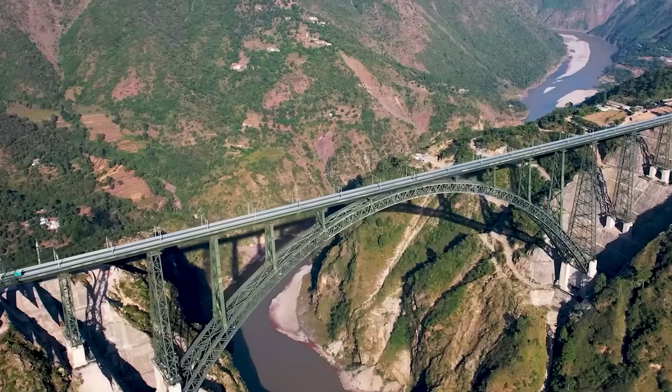Picture this. You're standing 359 meters above a raging river, higher than the Eiffel Tower. Now imagine building a railway bridge at that height in the Himalayas, in one of the most earthquake-prone zones on Earth. India just finished exactly that.

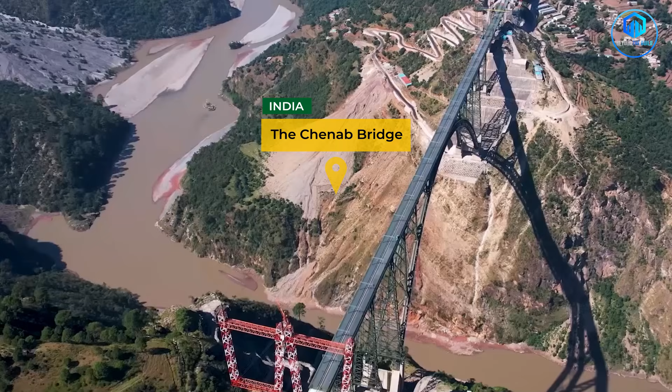But this never started as a record-breaking project. The Chenab Bridge became the world's highest railway bridge because of where it had to be built. The height was the price of the location, and that location is where the real story begins.

Let's talk about Jammu and Kashmir, one of the hardest places in the world to reach. The Chenab River cuts through the Himalayas, creating gorges so deep that for centuries, locals accepted some places couldn't be connected. Roads washed away in monsoons. Most engineers who looked at the gorge just walked away.

The terrain here doesn't just challenge construction, it punishes it. The gorge: the Chenab River sits at the bottom of a valley so deep that standard bridge building techniques don't apply. You can't build supports from the riverbed up, the distance is too extreme, and the rock formations are unstable.

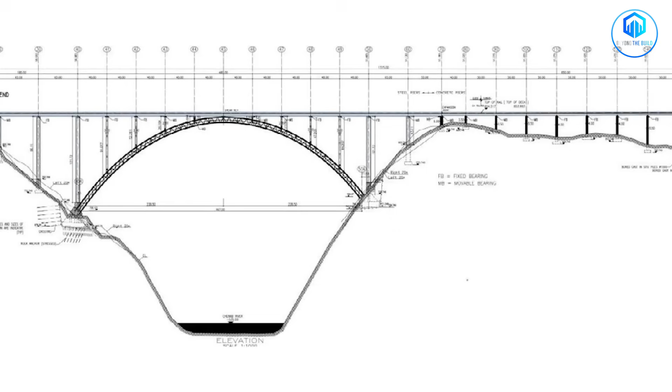Seismic activity: this region sits in seismic zone V, the highest earthquake risk category in India. Every structure needs to withstand tremors that would collapse buildings elsewhere. When the earth moves, everything you've built needs to move with it without breaking.

Himalayan winds: wind speeds here can exceed what most bridges are designed to handle. Forces that can lift vehicles off roads and tear metal structures apart.

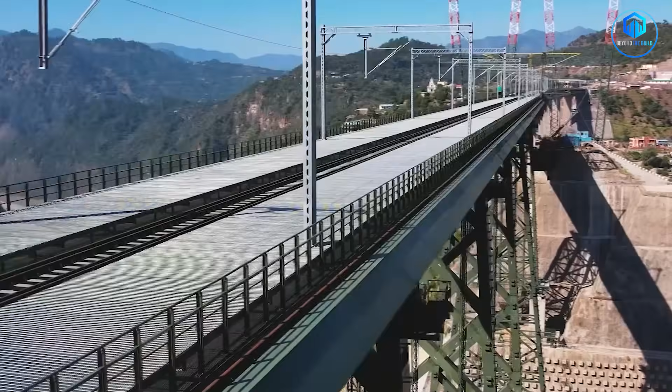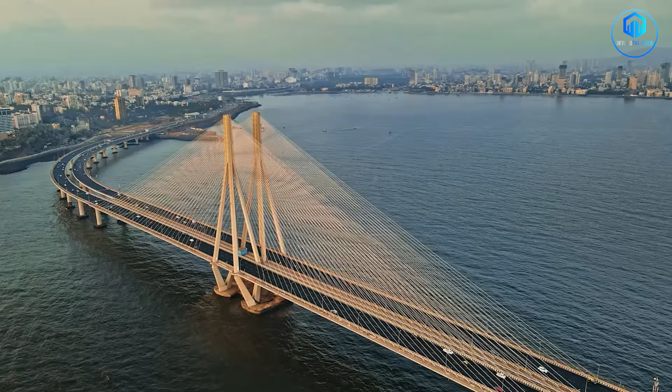Temperature extremes: summer heat reaches 45 degrees Celsius, winter cold drops below -10. Steel and concrete expand and contract constantly. Materials that work in Mumbai or Delhi crack and fail in the Himalayas.

For a very long time, Jammu and Kashmir remained partially isolated because nature made connection almost impossibly expensive. Roads closed for months during heavy snow. A single landslide could cut off entire districts. Medical emergencies became death sentences. Economic development stalled because goods couldn't move reliably. Without year-round, weatherproof transportation, the region remained vulnerable.

When a region can be cut off by a snowstorm, it changes everything: how people live, how businesses operate, how the government can respond to crises. So the question became, how do you build permanent, reliable connections in a place that destroys everything you build? The answer turned out to be a railway bridge that nobody believed was possible.

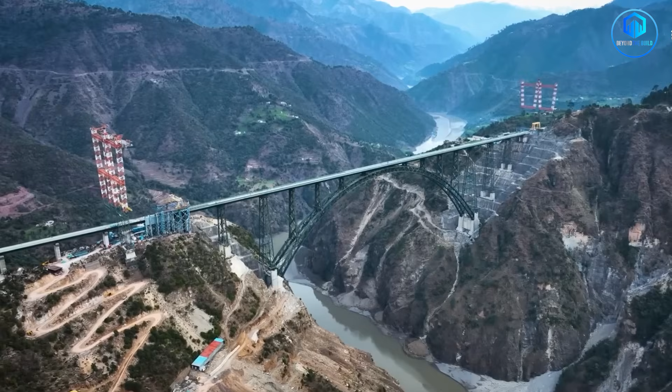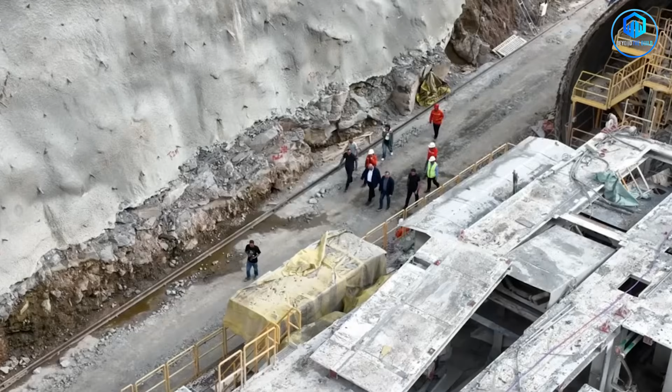When engineers first surveyed the Chenab Gorge in the 1990s, their initial reaction was clear: avoid the bridge if possible. Tunnels seemed smarter. Tunnels protect trains from weather, they're hidden from view, which matters in sensitive regions, and most importantly, tunnels don't require you to suspend hundreds of tons of steel and concrete 359 meters above a river. So they tried the tunnel approach first.

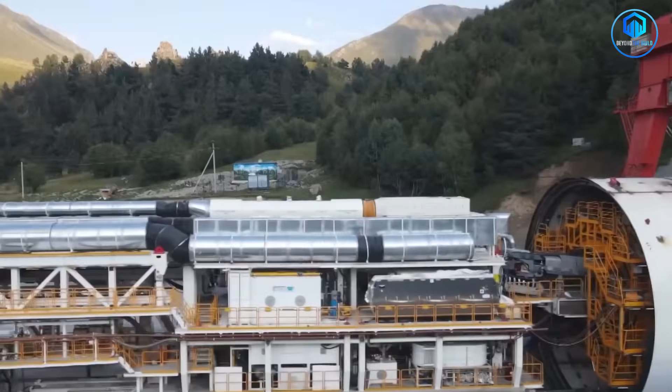The plan was to drill through the mountains, bypassing the gorge entirely. Work began, money was spent. Engineers drilled into solid rock. And then they hit the problems: unstable rock formations.

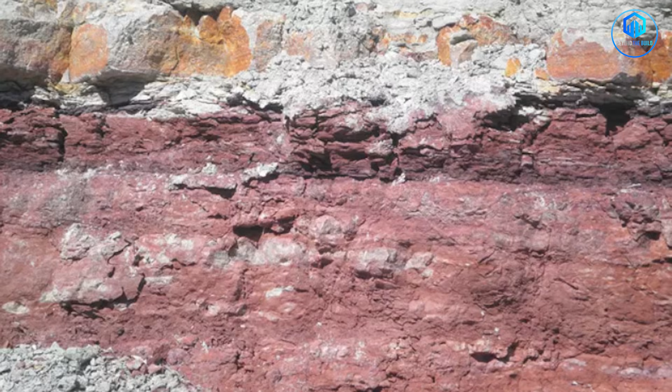The Himalayas differ from older, stable ranges like the Appalachians. These mountains are young, still rising, still shifting. The rock layers are fractured and unpredictable. Tunnels that appeared stable on surveys often ran into sections where the rock was so broken that standard tunneling methods failed.

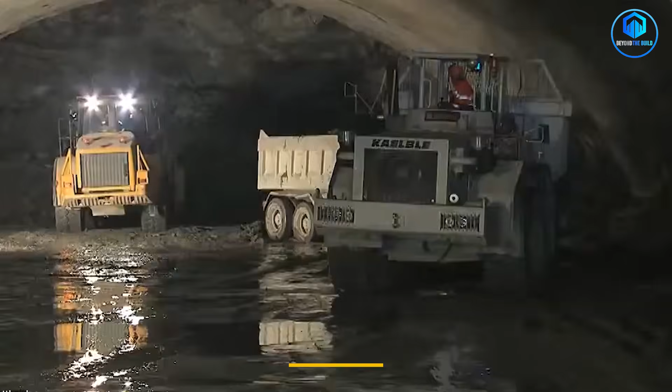Water: underground water sources in the Himalayas don't follow predictable patterns. Drill into the wrong spot, and you're suddenly dealing with floods inside your tunnel. Controlling water flow at this scale, in these conditions, became a nightmare.

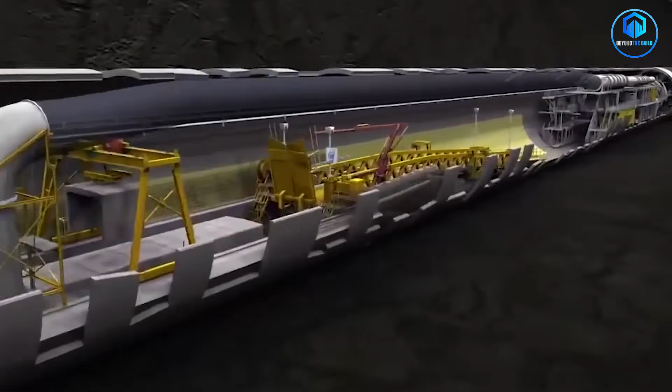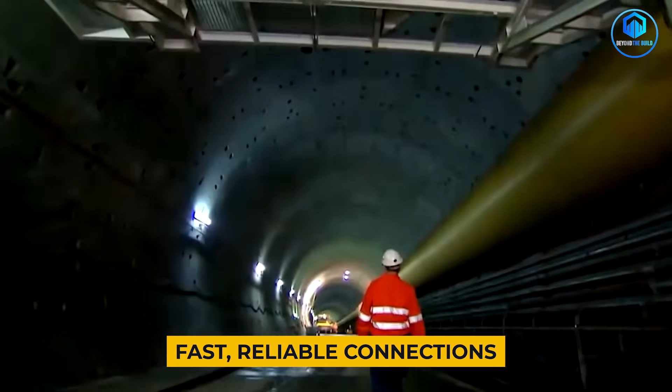Length: to avoid the gorge completely, the tunnel would need to be so long that travel time would increase dramatically. The whole point of this railway was to create fast, reliable connections. A tunnel that added hours to every journey defeated the purpose.

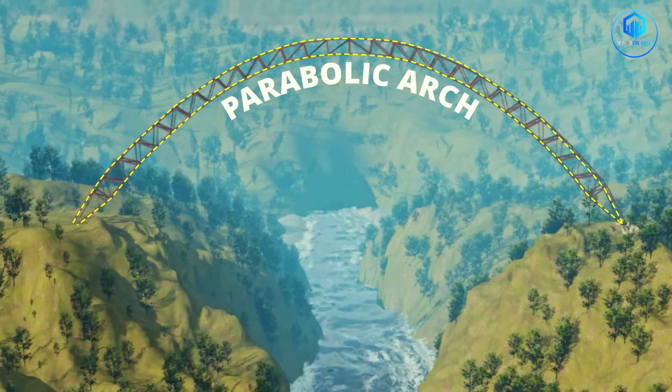After years of attempts and delays, the conclusion was unavoidable: there was no way around the gorge. The only way forward was across it. But crossing it meant building something unprecedented. Traditional bridge designs didn't work. The span was too wide, the height was too extreme, the geological conditions were too unstable.

What they needed was an arch bridge, a design where the structure itself bears the load through compression, making it incredibly strong against both its own weight and external forces like earthquakes and wind. But arch bridges at this height had never been attempted for railways.

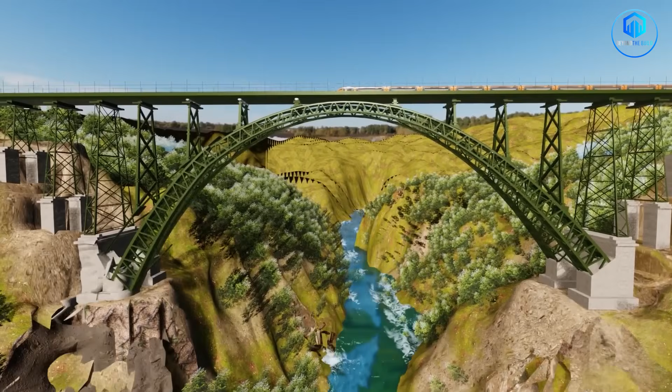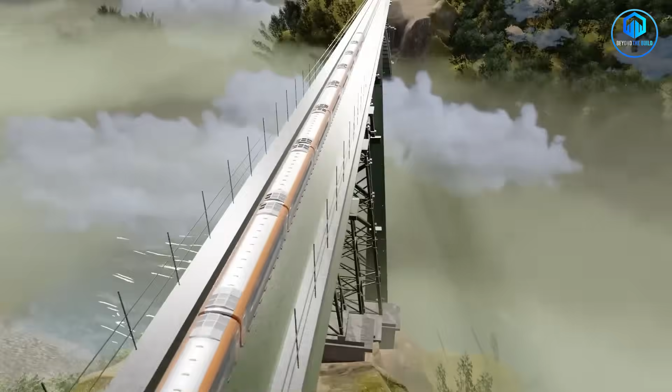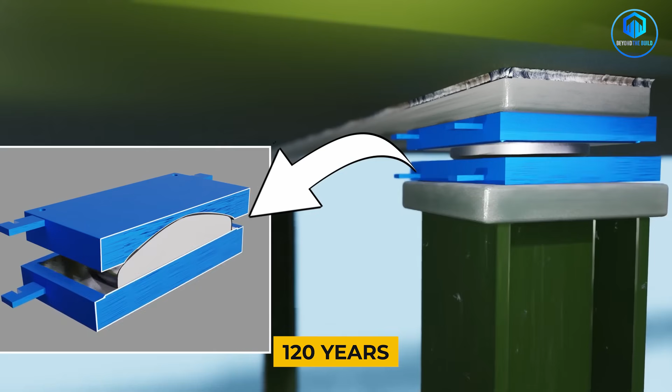Think about what this means. You're not just building a bridge, you're creating a structure that needs to support the weight of fully loaded freight trains, withstand earthquakes that would level most buildings, resist wind forces that could literally blow train cars off the tracks, function in temperatures that swing 55 degrees between seasons, last for at least 120 years with minimal maintenance. And you're building it in a place where getting materials and equipment to the construction site is itself a major engineering challenge.

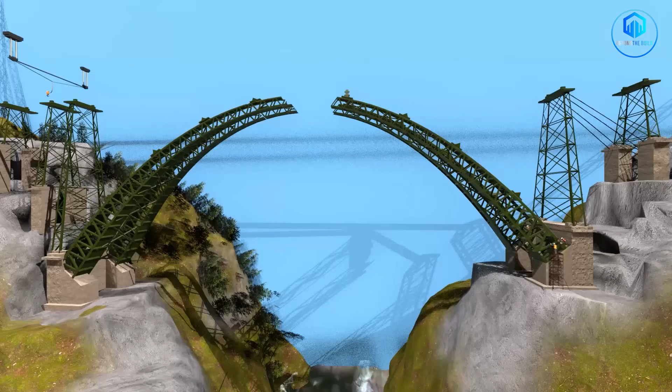That record-breaking height of 359 meters came from necessity, not spectacle. It was the minimum height required to span the gorge while maintaining structural integrity. Go any lower, and the arch angle becomes too shallow - the physics doesn't work, the bridge collapses under its own weight. Go higher, and you're adding unnecessary cost and risk. 359 meters was the solution to an equation, not a vanity metric.

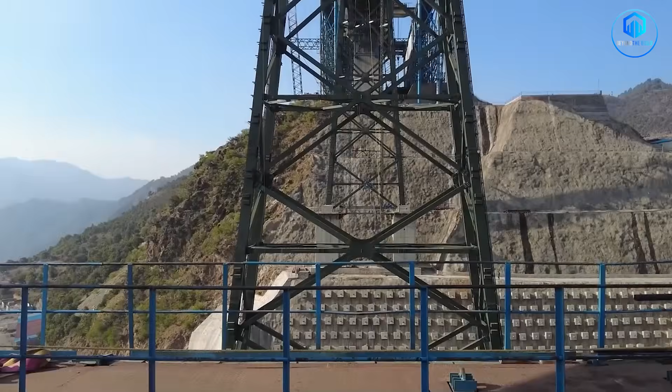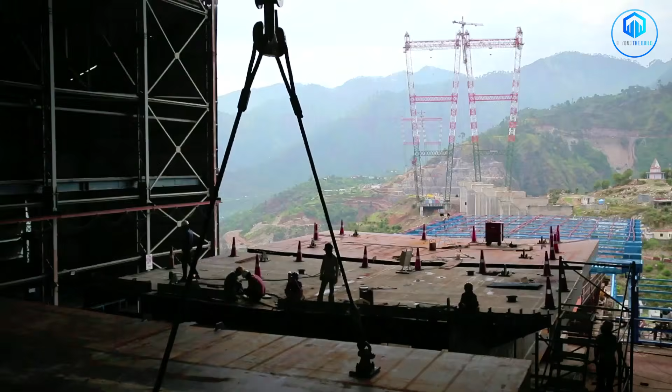Now let's talk about what it actually takes to build something like this. Construction began in 2004. The original completion target was 2009. It took until 2024, so 20 years to finish. That's not because of incompetence or corruption. It's because every single aspect of this project required solutions that had never been tested before.

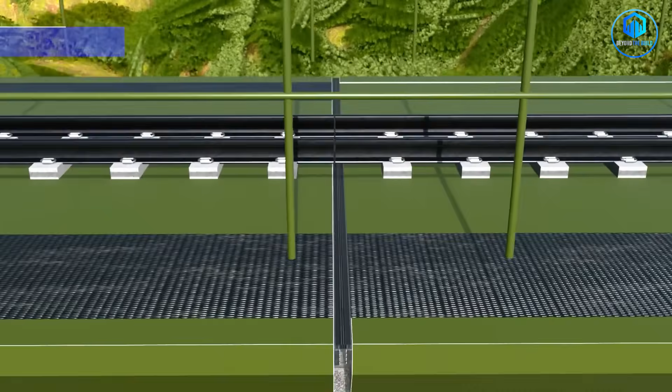The wind problem. Typical railway bridges are designed so that trains stop running long before winds reach extreme levels. But the Chenab Rail Bridge itself is engineered to withstand winds of up to about 260 kilometers per hour in the gorge. At those speeds, wind does more than push against the bridge, it creates vibrations that can tear steel apart from within.

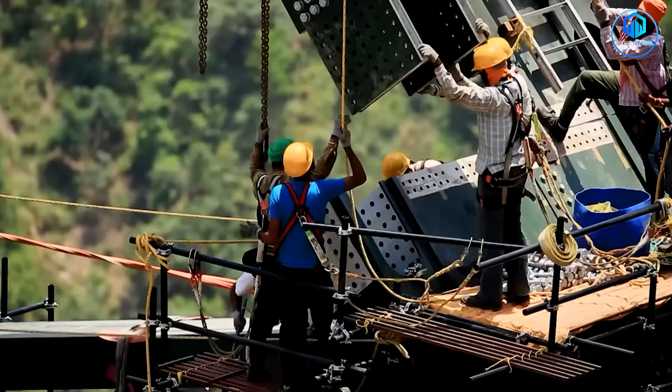The solution? A design called a cable-stayed arch that uses aerodynamic shaping to let wind flow around the structure instead of slamming into it. But that required wind tunnel testing at scales no one had attempted for a railway project in India. Engineers built scale models and tested them in facilities in Denmark and Japan. They simulated wind patterns specific to the Chenab Valley. They calculated the exact angle and shape of every beam to minimize resistance, so the bridge would be able to resist under extreme wind conditions.

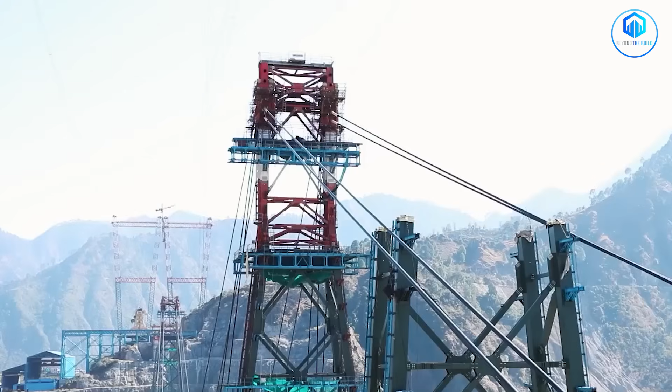The earthquake problem. Seismic Zone V means this bridge needs to survive earthquakes measuring up to 8 on the Richter scale. But here's the tricky part: you can't make a bridge completely rigid. Rigid structures crack and collapse during earthquakes. What you need is flexibility, the ability to move with the ground without breaking.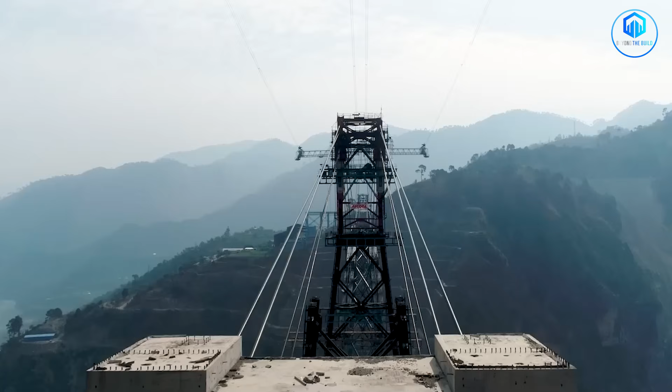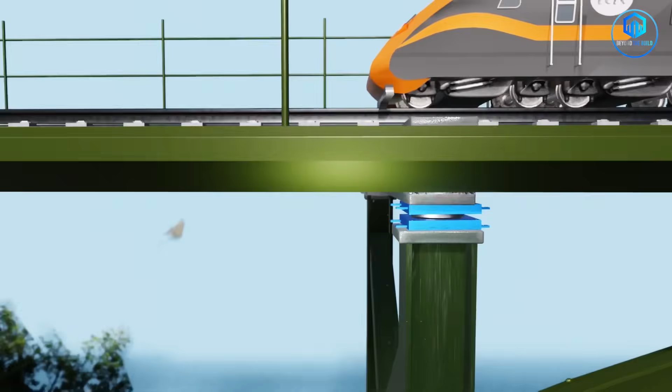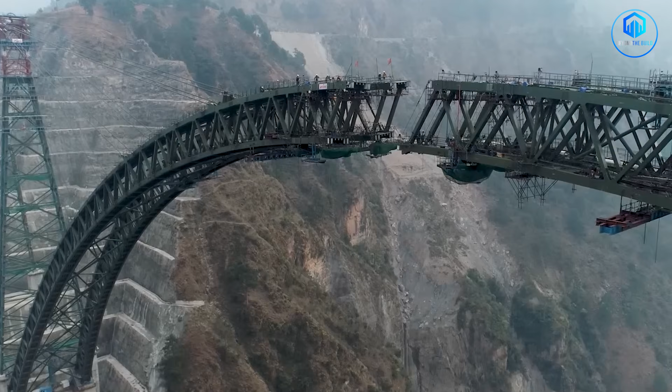The Chenab Bridge uses something called base isolation technology, shock absorbers built into the foundation that let the bridge sway during an earthquake, absorbing the energy instead of fighting it. Think of it like a car's suspension system, but for a structure weighing 25,000 tons. Testing this required simulating earthquakes in laboratories. They built sections of the bridge and literally shook them with hydraulic machines that replicate seismic waves. Every joint, every bolt, every weld had to prove it could handle the stress.

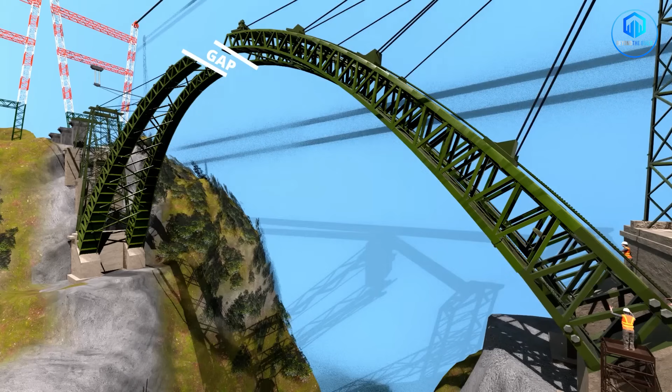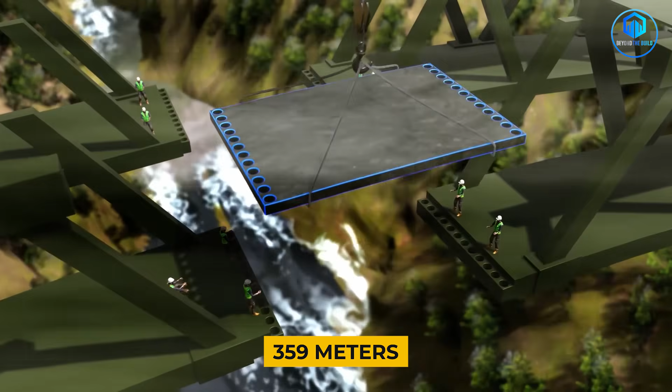The precision problem. When you're building a bridge this size, precision matters in ways that are hard to imagine. The two sides of the arch were built simultaneously from opposite ends of the gorge. They had to meet in the middle with millimeter-level accuracy. Think about that: you're building two massive structures, each weighing thousands of tons, on opposite sides of a gorge, and they have to align perfectly when they meet 359 meters above a river. Any miscalculation, and the pieces don't fit. You can't just hammer them together and hope for the best.

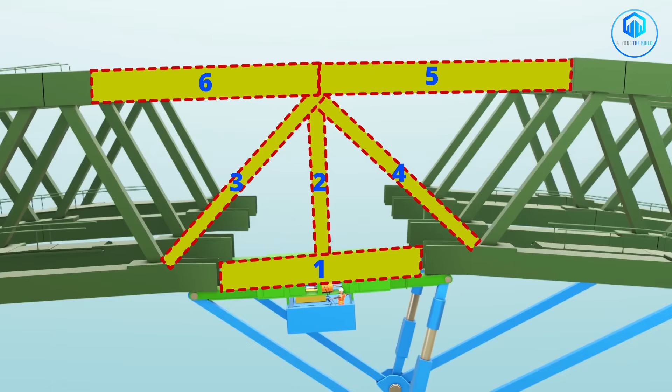The engineering team used GPS-guided systems that adjusted in real time for temperature changes, wind deflection, and even the weight of workers on the structure. They calculated how much the steel would expand in sunlight and contract at night. They accounted for gravitational pull differences at different elevations. When the two sides finally met in 2021, they were off by less than 2 centimeters.

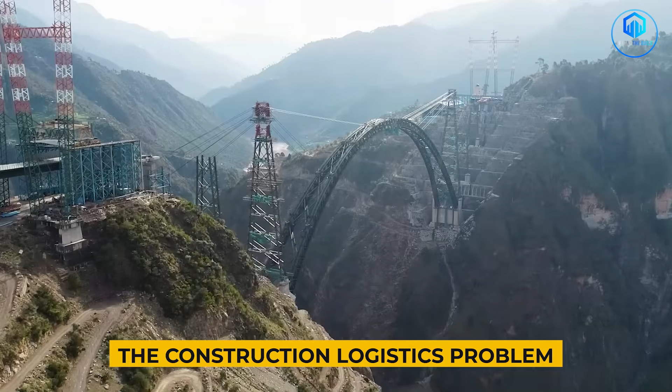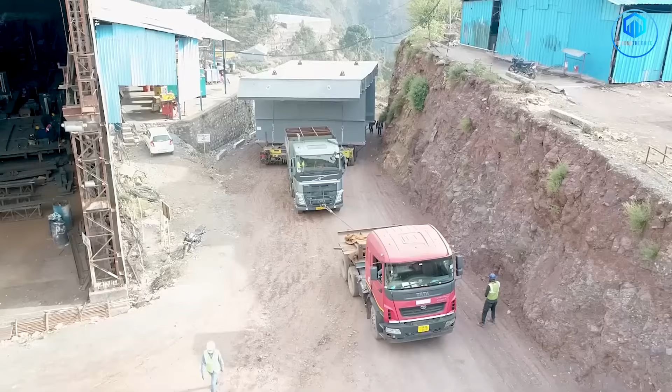The construction logistics problem. Here's something most people don't think about: how do you even get construction materials to a gorge in the middle of the Himalayas? There were no roads capable of handling the heavy equipment needed, so they built roads. Then those roads got destroyed by monsoons, so they built them again. Steel beams weighing 100 tons each had to be transported on trucks that could barely navigate mountain curves. Concrete had to be mixed on-site because it would harden before reaching the construction zone if transported from cities.

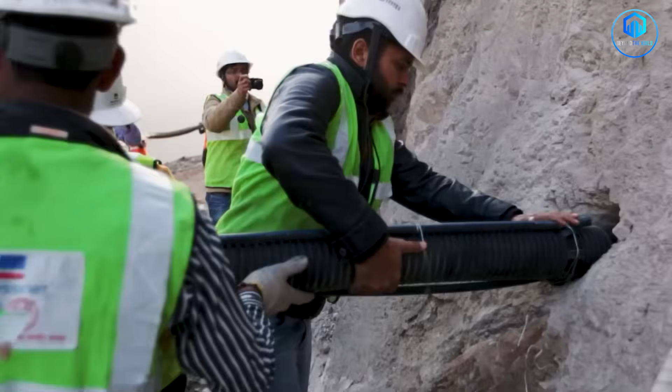Workers lived in temporary camps with minimal facilities. Medical emergencies meant helicopter evacuations. During winter, construction stopped completely because conditions became too dangerous. And through all of this, the project faced constant political pressure. Every delay meant more criticism. Every cost overrun meant more scrutiny.

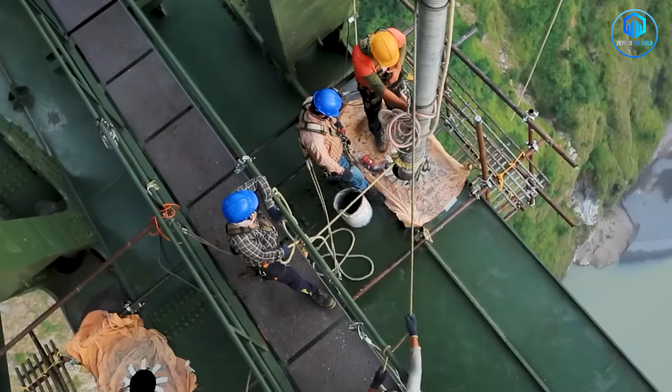But they kept building. So why go through all this? Why spend over $500 million and 20 years on a single bridge? Because in certain places, connection is non-negotiable. Let me explain what rail connectivity actually means in a region like Jammu and Kashmir.

Roads versus rail. The reliability question. Roads in the Himalayas are seasonal. Heavy snow closes them for months. Landslides block them for weeks. During the 2014 Kashmir floods, entire highway sections were washed away, cutting off hundreds of thousands of people.

Roads in the Himalayas face constant pressure from nature. Heavy snowfall blocks high-altitude routes for long stretches during winter. Landslides bury sections of mountain highways without warning. Floods damage surfaces and wash away entire stretches of road. During the 2014 Kashmir floods, key highway links collapsed, leaving hundreds of thousands of people stranded and supplies delayed.

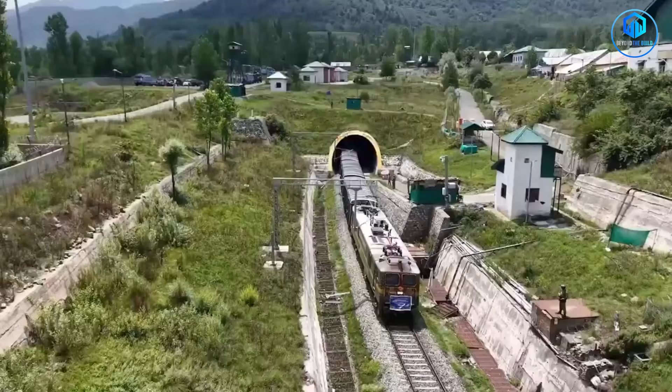Railways offer a different level of stability. Trains operate through snow and rain. Tracks sit on engineered foundations designed to handle extreme conditions. Once the line exists, it provides a year-round connection that holds steady through seasons that often shut down road travel.

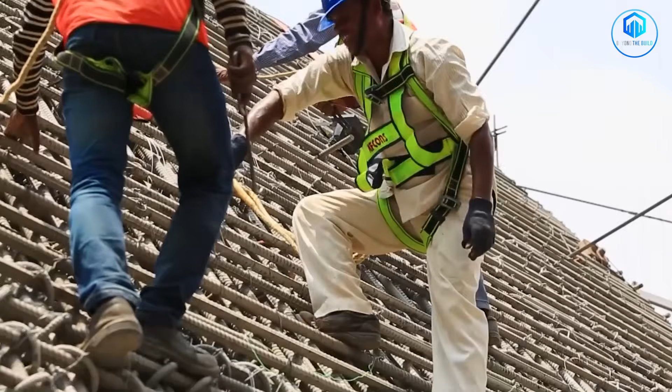But here's the critical part: railways move more than people, they move everything. Medical supplies can reach remote hospitals faster. Construction materials arrive in bulk for infrastructure and housing projects. Farmers gain reliable access to markets across the country. Military logistics gain speed and consistency in a region where terrain often slows movement. A single freight train can carry the load of around 50 trucks navigating narrow mountain roads. It moves that cargo in one coordinated system, with lower cost, fewer delays, and far greater predictability.

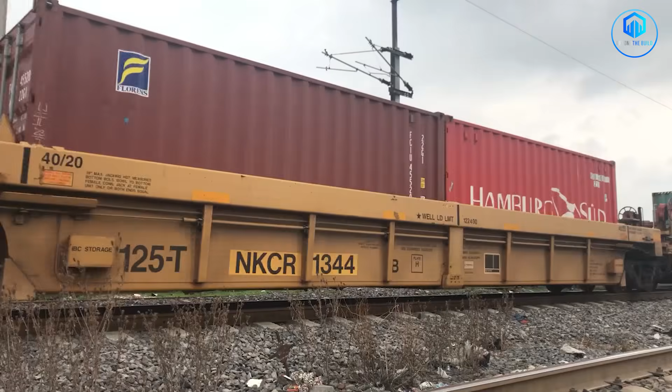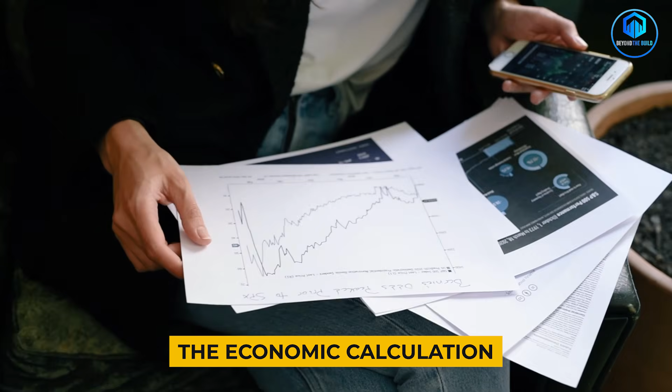Over time, that kind of reliability reshapes how a region functions. Businesses invest with more confidence, supply chains stabilize, travel becomes routine instead of uncertain. In a place defined by difficult terrain, dependable rail access creates a foundation for long-term economic and social integration. The economic calculation: before this bridge, moving goods from Jammu to Kashmir meant either flying them, insanely expensive, or trucking them through roads that could close without warning.

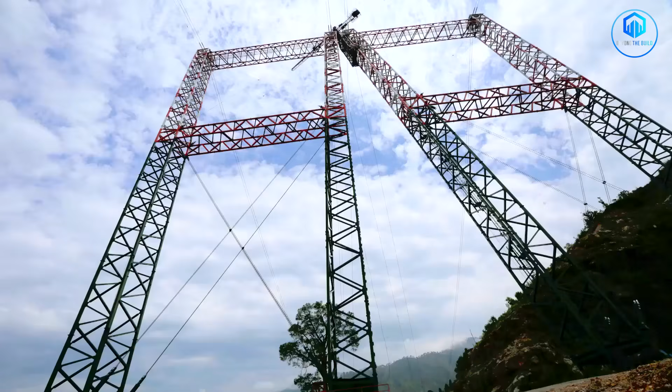Businesses couldn't plan. Farmers couldn't guarantee their produce would reach markets. Construction projects faced constant delays because materials couldn't arrive on schedule. The Chenab Bridge does more than connect two points on a map.

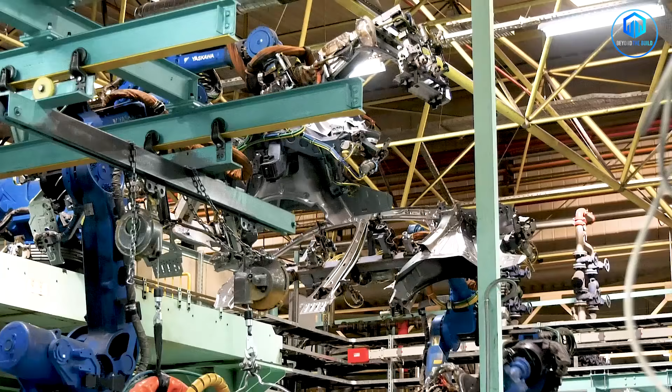It makes the entire region economically viable in ways that didn't exist before. Industries that couldn't exist in Kashmir because of transportation uncertainty, now they can. Tourism infrastructure that was too risky to invest in is now feasible. The bridge creates predictability, and in economics, predictability is everything.

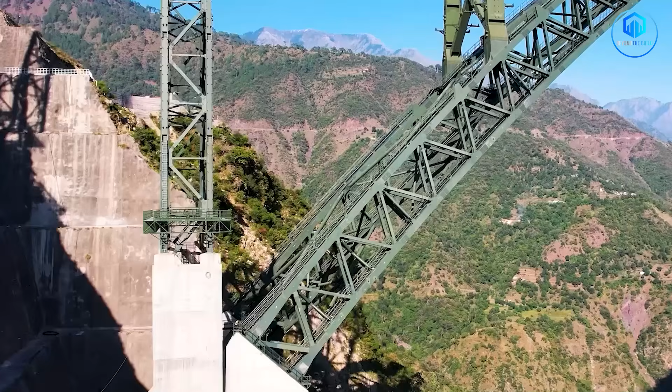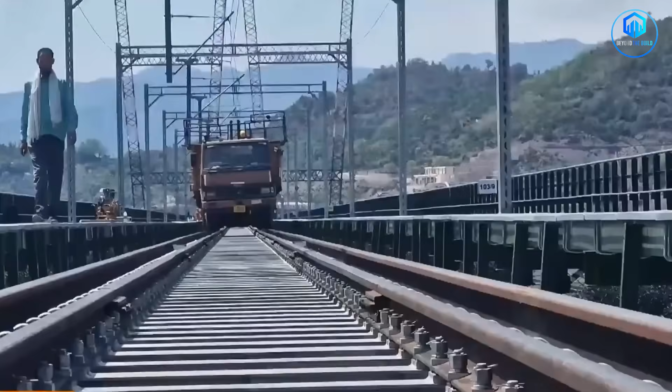The strategic reality: let's not pretend infrastructure is politically neutral. Jammu and Kashmir is one of India's most sensitive regions. Borders are disputed. Insurgency has been an issue for decades. The central government's ability to move personnel and equipment quickly matters. A railway that works year-round means military logistics aren't dependent on road conditions. It means reinforcements can arrive in hours instead of days. It means the region can't be isolated by weather or sabotage.

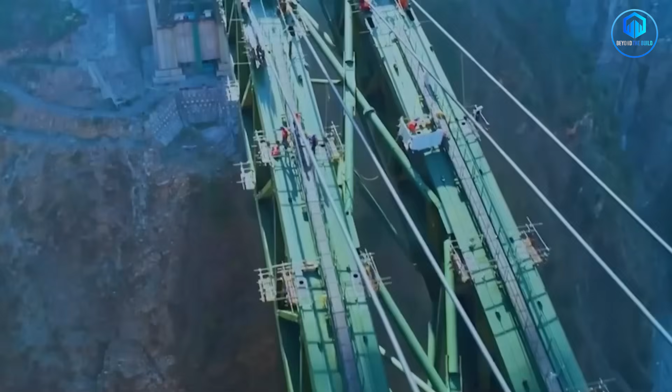Some people call this militarization, others call it stability. The truth is probably somewhere in between. But what's undeniable is this: India decided that keeping Jammu and Kashmir connected was worth any cost, any delay, any difficulty. The bridge is the physical manifestation of that decision.

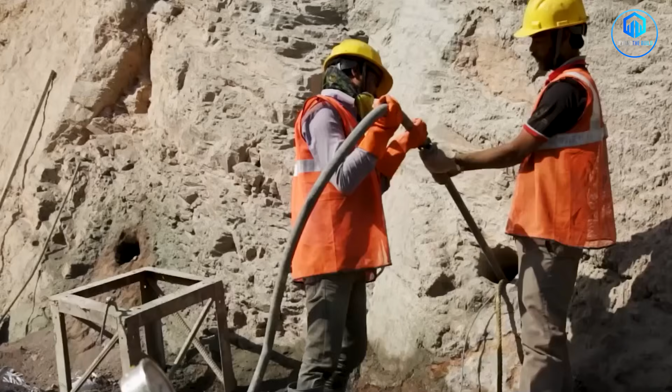Let's talk about the numbers everyone obsesses over. The cost: over $450 million. For context, that's more than the entire annual budget of some small countries. It's enough to build nearly 1,000 regular houses. It's the kind of money that makes government auditors nervous.

Critics called it wasteful. They said the money could have been spent on schools, hospitals, rural development, and they had a point—that money could have gone toward other priorities. But infrastructure goes beyond choosing between good options. It focuses on solving problems that continue to exist. Without this bridge, the railway connecting Kashmir to the rest of India was incomplete. Incomplete railways don't work—they're like building 90% of a highway and expecting cars to teleport across the missing section.

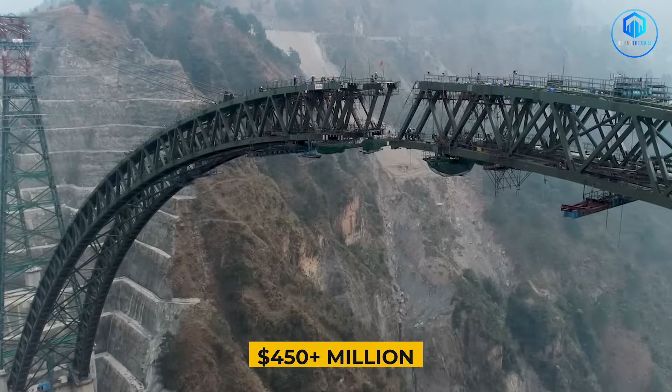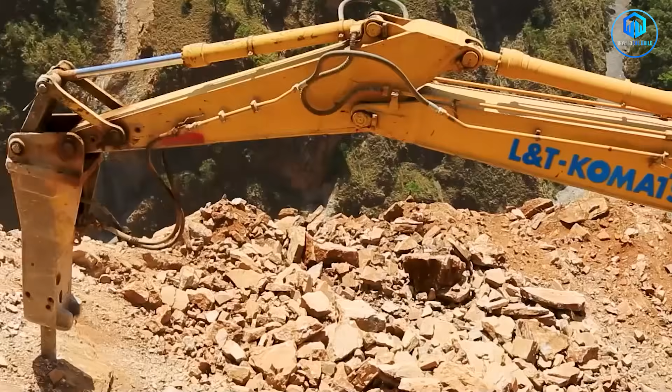The $450 plus million wasn't the cost of one bridge. It was the cost of making the entire railway system functional. The timeline: 20 years. Construction officially started in 2004. The bridge arch was completed in 2024. Two decades—governments changed, engineers retired, entire careers began and ended during this project.

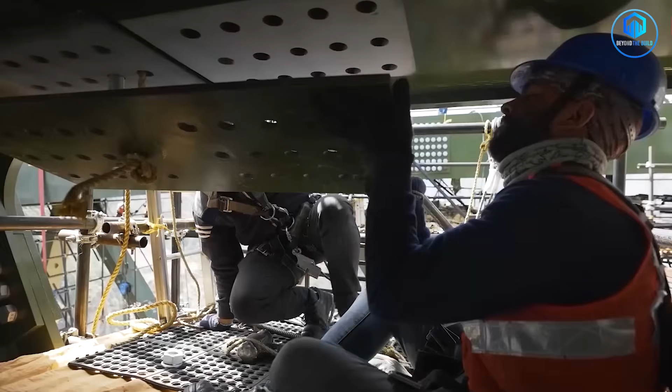Why so long? Part of it was technical complexity. Part was the harsh environment. Part was political delays and funding issues. But part of it was something simpler: nobody wanted to rush and get it wrong.

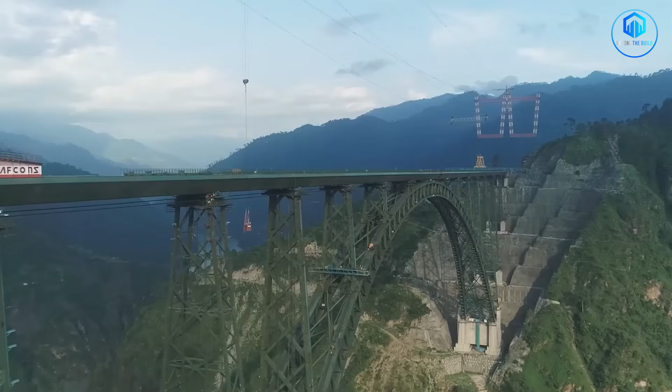If this bridge failed—if it collapsed, if a train derailed, if an earthquake brought it down—the consequences would be catastrophic, not just in lives lost, but in public trust destroyed. So they took their time. They tested everything twice. They halted construction when conditions weren't safe. They redesigned elements that didn't meet specifications. The delays frustrated everyone, but the alternative was unacceptable.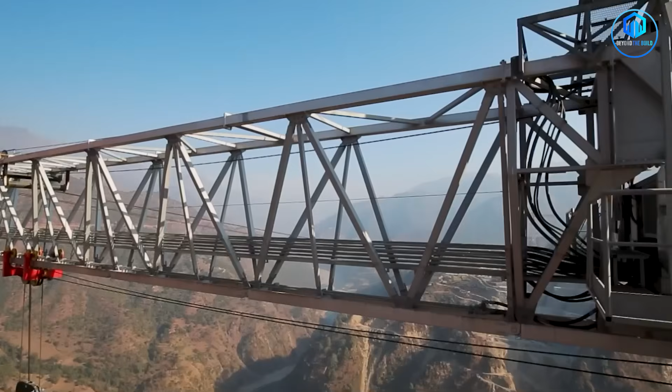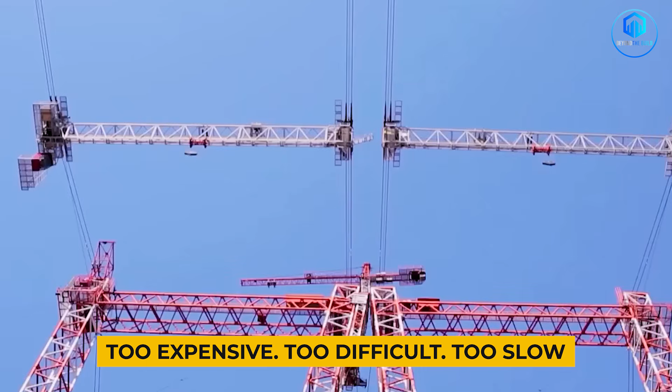The persistence—here's what impresses me most about this project. It was questioned constantly, but never abandoned. Every few years, someone would propose cancelling it: too expensive, too difficult, too slow. And every time, the decision came back: keep building. That kind of institutional persistence is rare, especially on projects this expensive and politically sensitive.

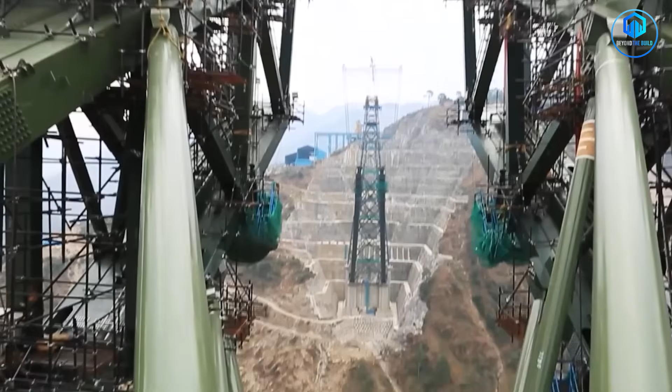Most mega projects that face this many delays get quietly shelved. The money gets redirected. The plans get postponed indefinitely. The Chenab Bridge could have ended that way a dozen times, yet it kept moving forward.

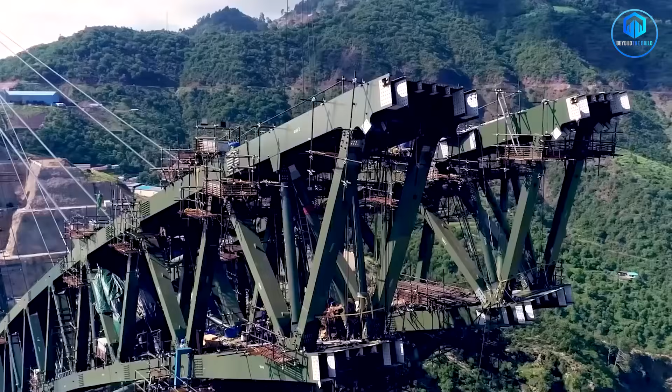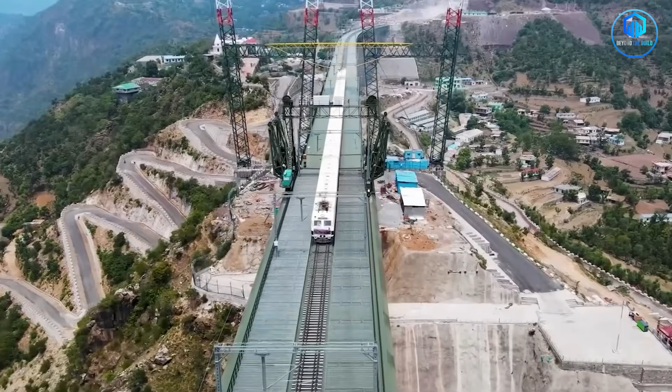In 2024, the Chenab Rail Bridge arch was officially completed. Trains begin crossing in 2025 as the full Udhampur-Srinagar-Baramulla railway line comes online. When it's fully operational, trains will cross the gorge at speeds up to 100 kilometers per hour. What used to take hours by road will take minutes by rail. The railway line that connects Kashmir to the rest of India will finally be complete.

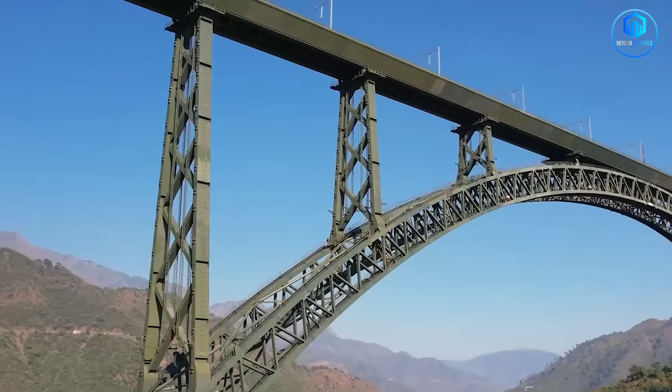The engineering worked, the bridge stands, the trains are coming. So, success, right? Well, maybe. Here's the thing about infrastructure at this scale: you don't know if it worked until decades later.

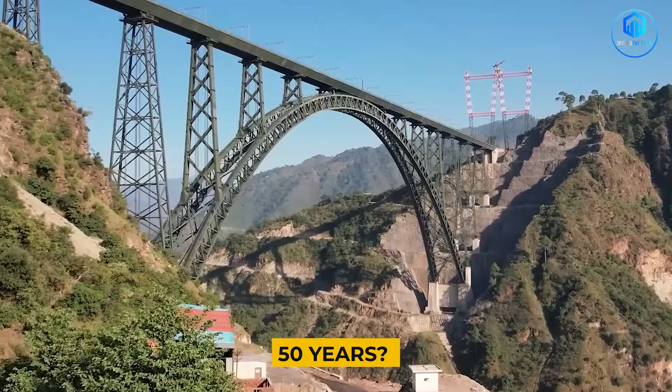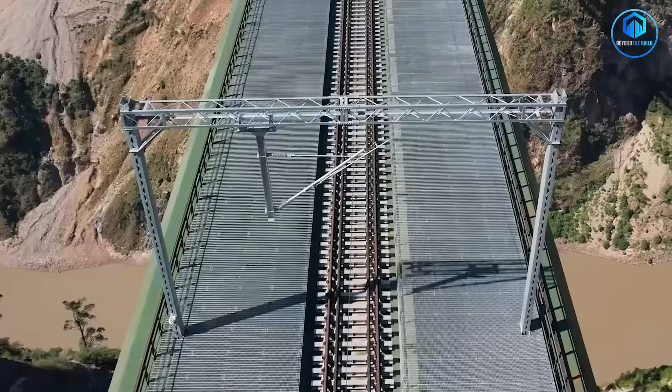Will the bridge still be standing in 50 years? Probably—it was designed for 120. Will it actually transform Kashmir's economy the way projections suggest? That depends on factors far beyond engineering: investment, political stability, how people and businesses actually use the connection. Will it reduce tensions in the region, or will permanent connection create new frictions? Nobody knows. Infrastructure shapes behavior in ways that are impossible to predict.

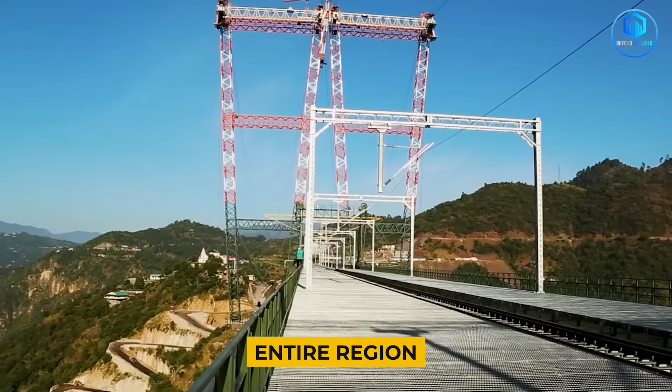The Chenab Bridge does more than cross a river. It permanently expands what's possible for the entire region. Travel patterns will change. Economic opportunities will shift. Strategic calculations will adjust. And all of that will unfold slowly, over years and decades, long after the engineers and politicians who built this bridge have moved on to other projects.

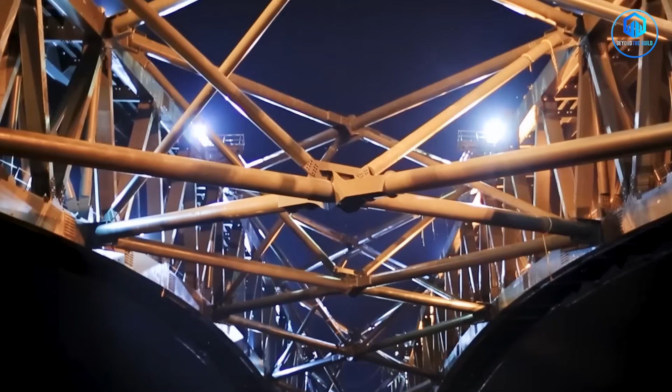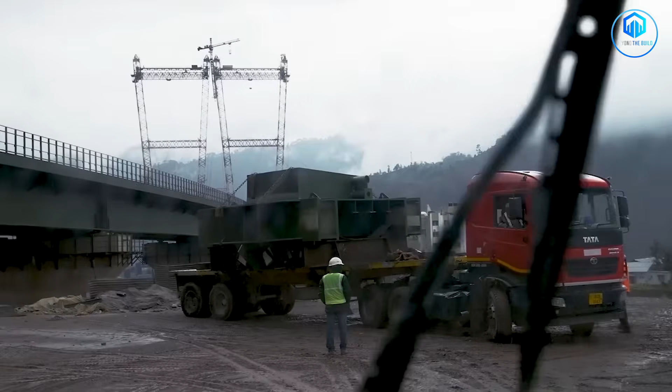The Chenab Bridge exists because India decided that leaving Kashmir isolated was unacceptable, not just strategically, but fundamentally. Whether that was the right decision, history will answer that. But the bridge itself, 359 meters above the Chenab River, standing against earthquakes and Himalayan winds, is already answering a different question.

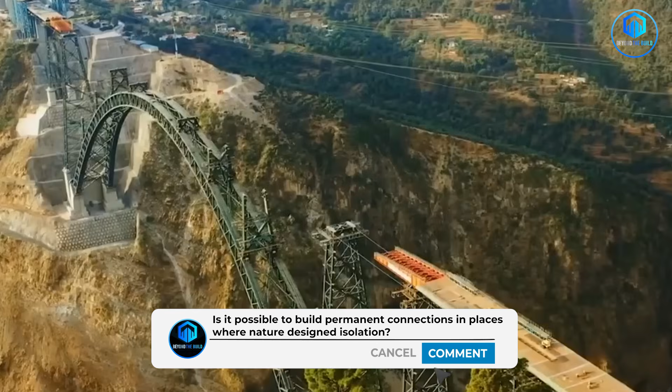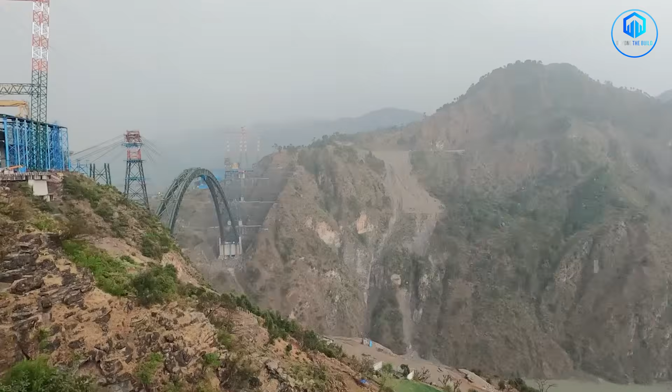Is it possible to build permanent connections in places where nature designed isolation? The answer, apparently, is yes. It just costs over $450 million, takes 20 years, and requires engineering at the absolute edge of what's possible. And that's where the story ends for now.